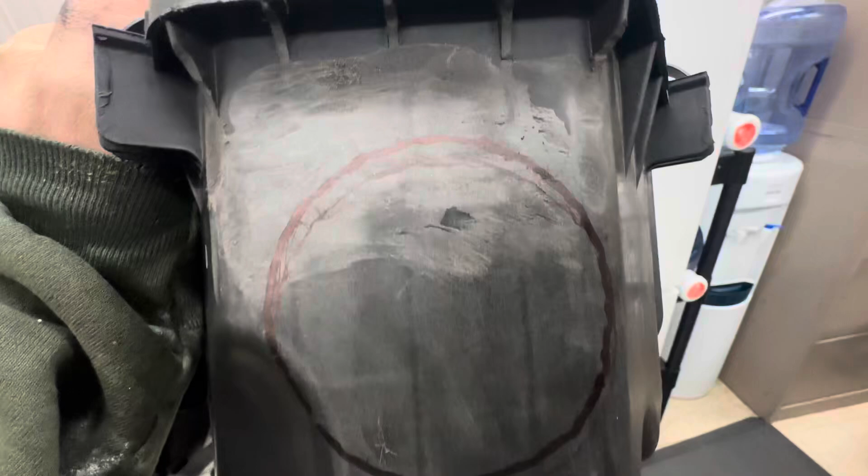Next step is to sneak a 3-inch hole saw right through the end of this, underneath where the air filter goes. Then the flange, the short end goes inside, the long end comes outboard. I'll drill a couple holes and use the stainless steel hardware to install that flange and waterproof it.

Okay, we have our 3-inch hole. Just barely snuck that in there.

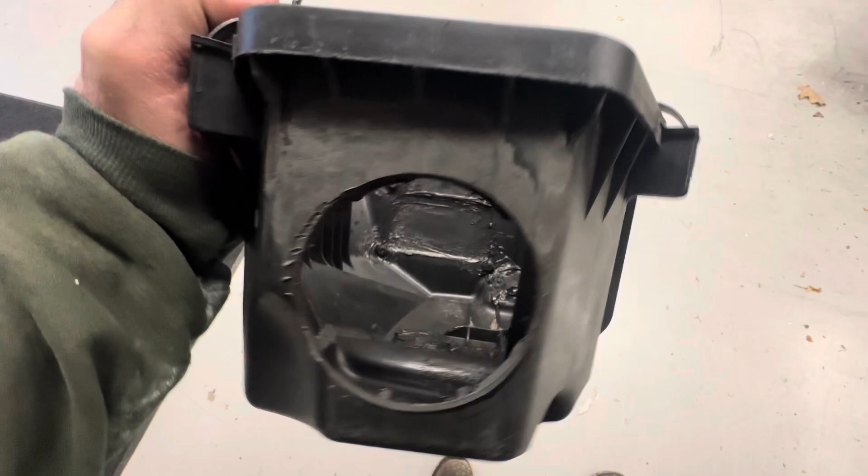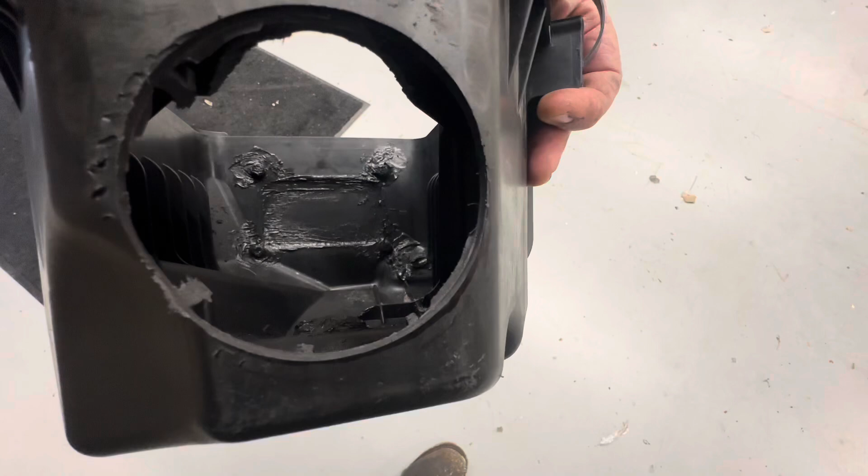As I said, the small part of the flange will go inside. We'll get that all siliconed up, duct seal, whatever I need. Then there'll be 4 holes that'll sneak in there for the stainless steel hardware - it's like an 8-32 by half-inch with a nylon locking nut. So I'm gonna take some sandpaper and clean that all up.

Obviously the air box for the 3.6 is slightly smaller on this side than the 3.8, so that's why it's just barely gonna squeak in there.

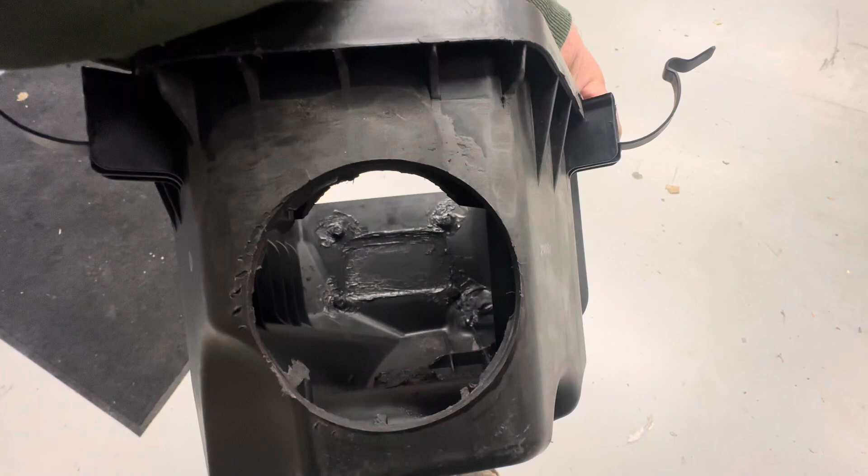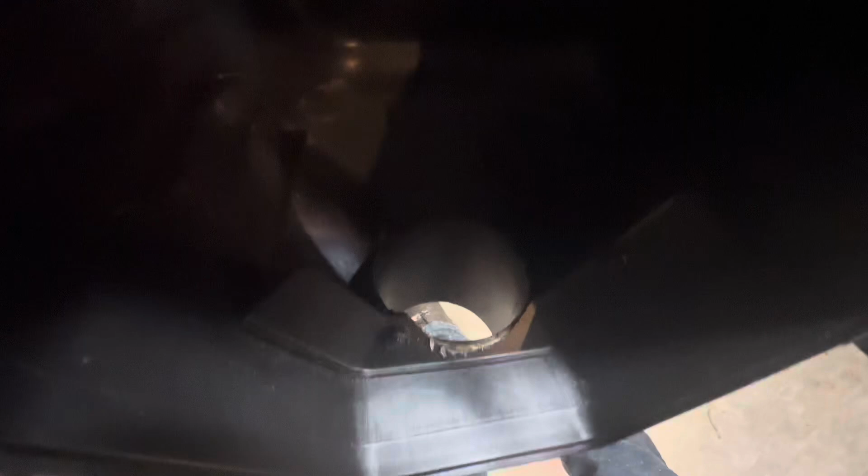Happily, the 3-inch hole fit perfectly. See the filter there. Obviously, I've got to silicone this all up - be a little tricky. I might have to. I think I can get the bolts through those holes right there.

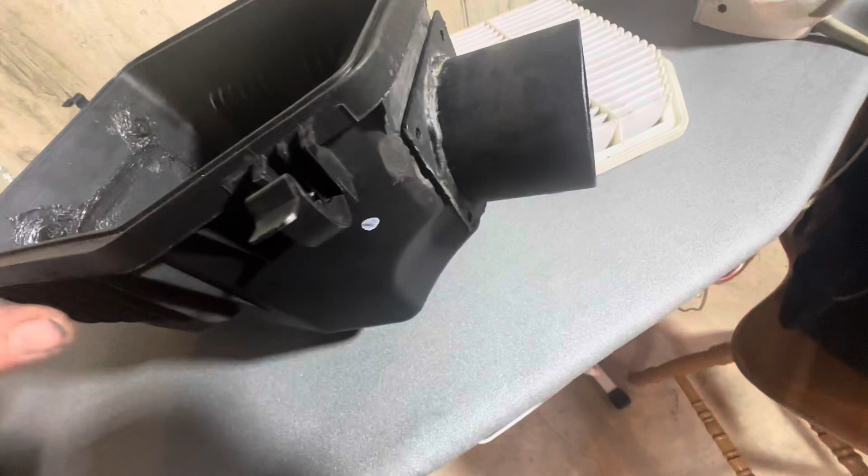On the bottom, it looks like I'm going to have to make a couple new holes. As I said, the air box for the 3.6 is a little different than on the 3.8, but this is going to work out great.

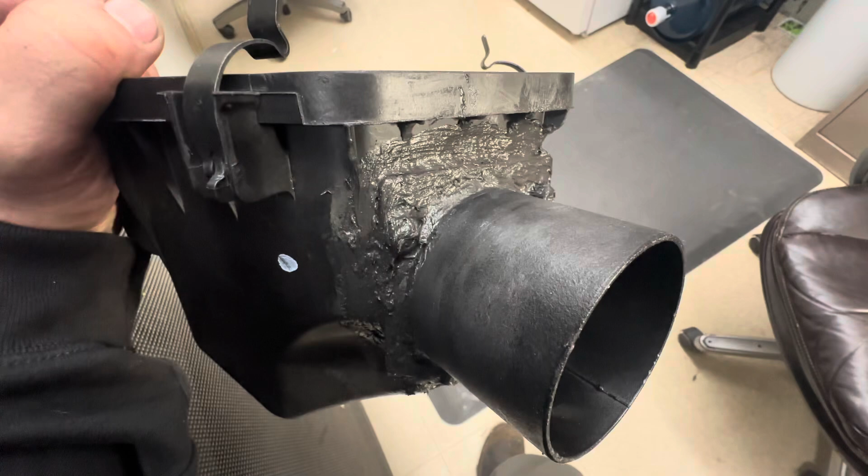Really nice. Okay, you can see that I had to drill some new holes in this flange because this side of the air box is a little smaller than the air box on the 3.8. The other thing I did is I put the bolt heads inside and put the nuts on the outside, and I was able to torque them up good.

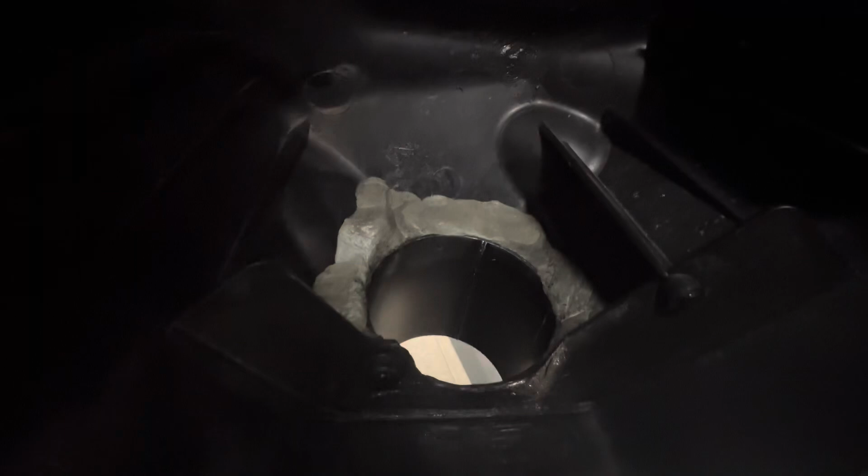A lot of silicone in there. When this dries, I'm going to put duct seal all around it. On the inside, you can see the duct seal all around. That stuff's incredible, it just gets really hard - it's an outstanding sealer. Quite honestly, Todd had something similar to this on his.

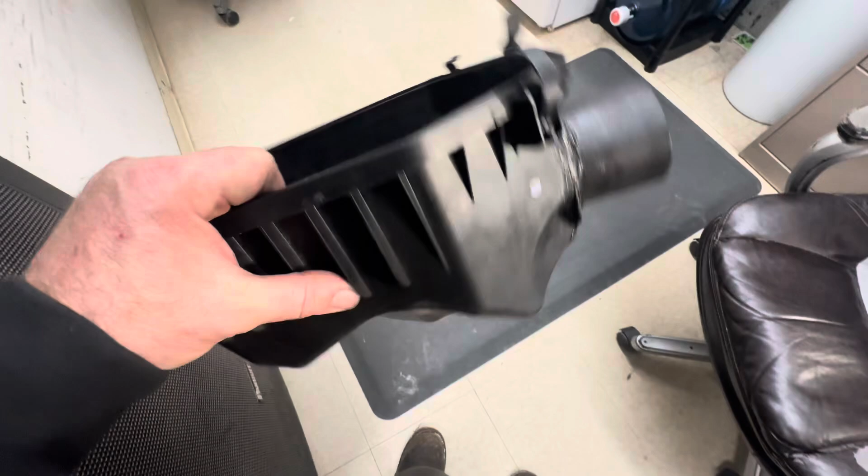So I think that when this dries, I'm going to put a nice bead of duct seal around this. That's going to dress it up and give it a whole other coating of protection. So the air box is just about waterproof - it's just got to dry now.

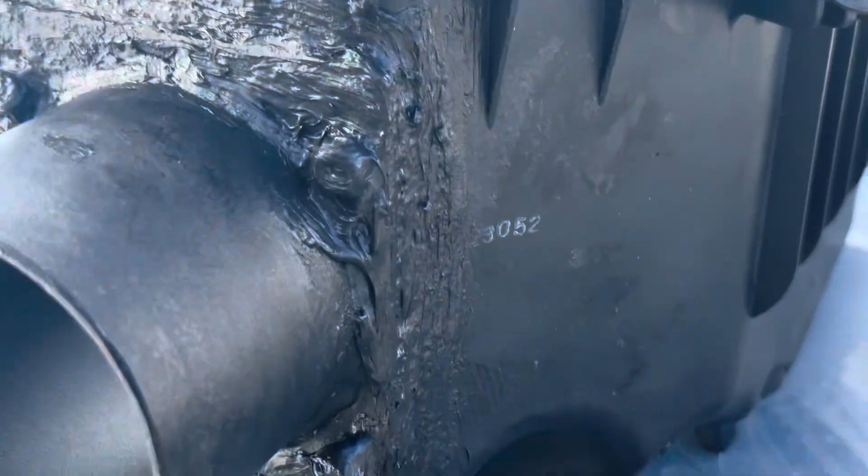Okay, the silicone is drying. It's sealed inside and out really good. You can see I reversed the nuts - it was just easier to set it up this way because that flange really fit in there tight and there wasn't much space. There's the duct seal all packed around there really well.

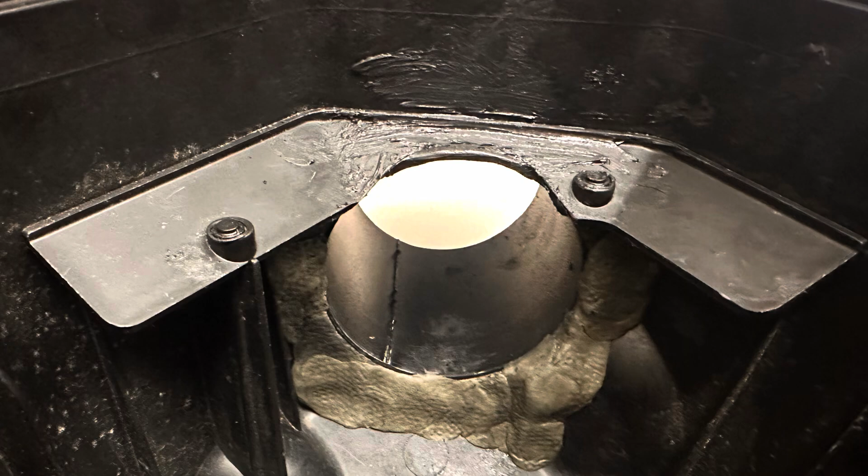After this silicone dries, I'm going to take that same duct seal material, there it is right there, and do a whole other nice coating over that. This stuff will dry kind of hard, but it's just extra protection. It looks better. Then I'm going to paint that entire exterior area black so everything's going to blend in and look really good. Quite happy with how this came out.

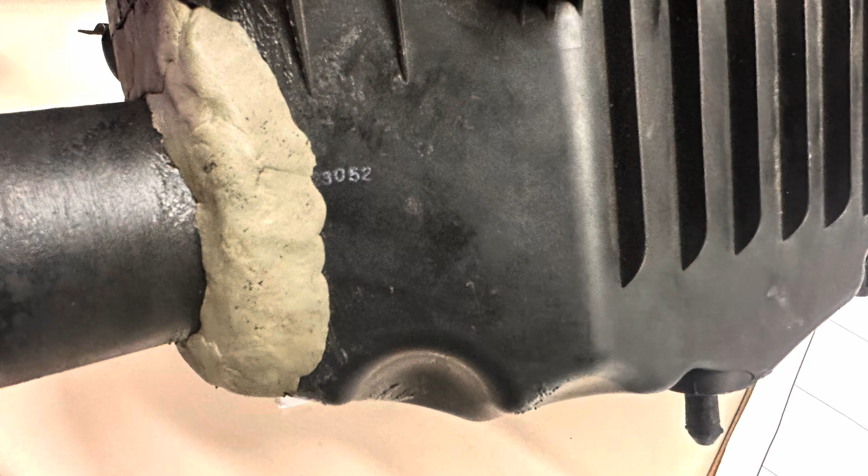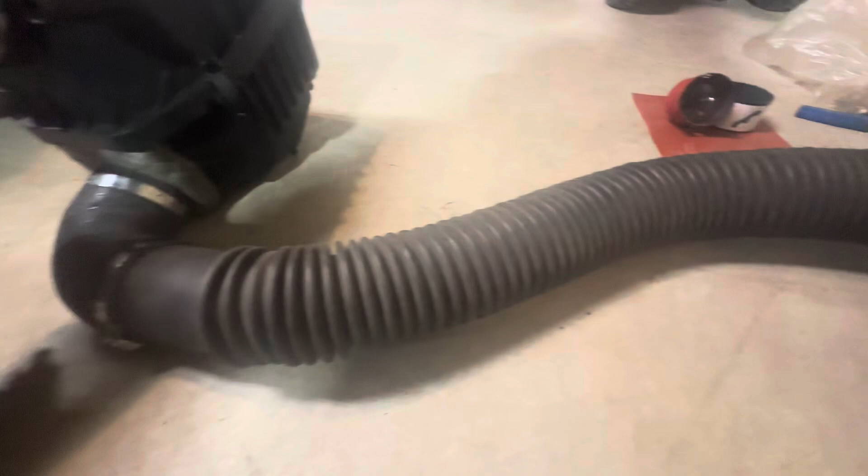All right, here's a look at the Snorkel setup in my basement, just kind of laying things out. I did get a bunch of new 3-inch hose clamps for this. I'm going to be polishing that up, probably repainting that mushroom piece right there. I want to get some silicone on these hoses and kind of bring them back to life, put some shine into them, clean them up good. So I'm doing that tonight, as well as spray painting the air box.

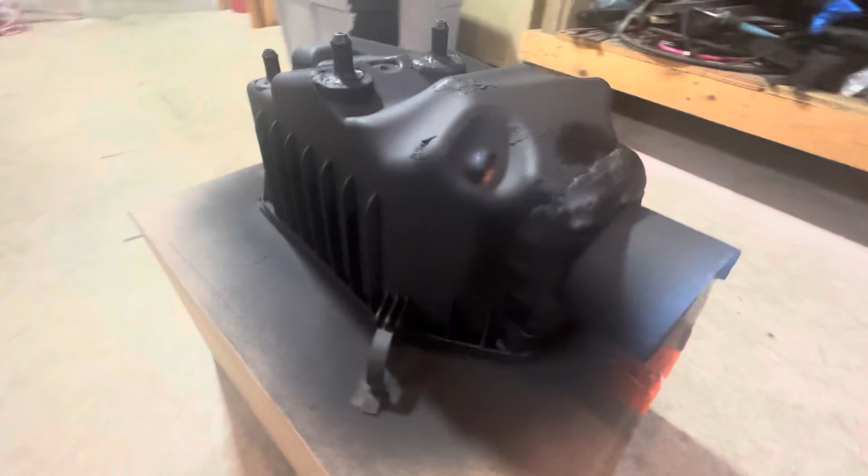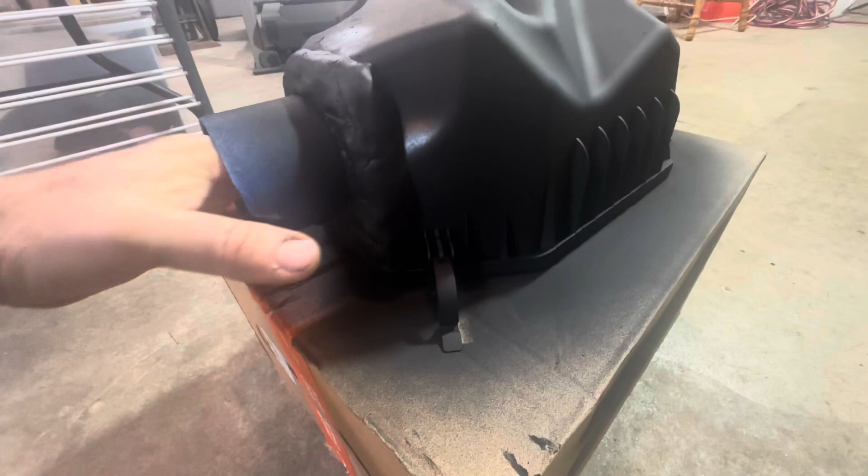Just painting the air box with some flat black spray paint. You can see the duct seal, the extra coating that I put all around the flange connection that was joined together with nuts and bolts and plenty of black silicone. You can see I just painted that up, so give this a little bit of time, and I just wanted it all to blend in.

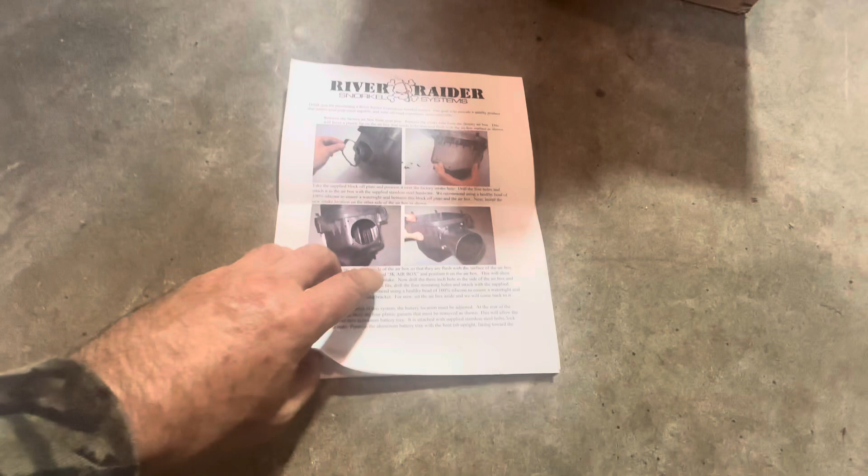Gonna be great. See, I was able to come up with some directions on the internet and print them out.

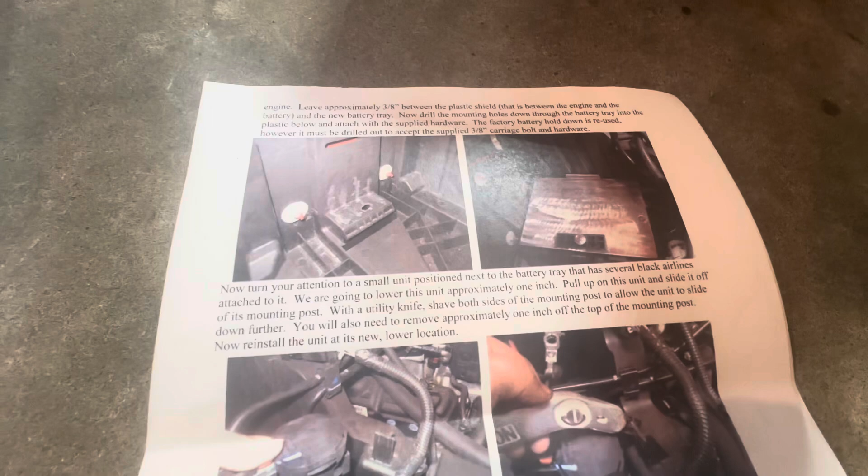Next, I'm going to be removing all the electrical and the battery, and grinding some gussets out of the battery box and installing an aluminum bracket, a holder basically, and shifting the battery over.

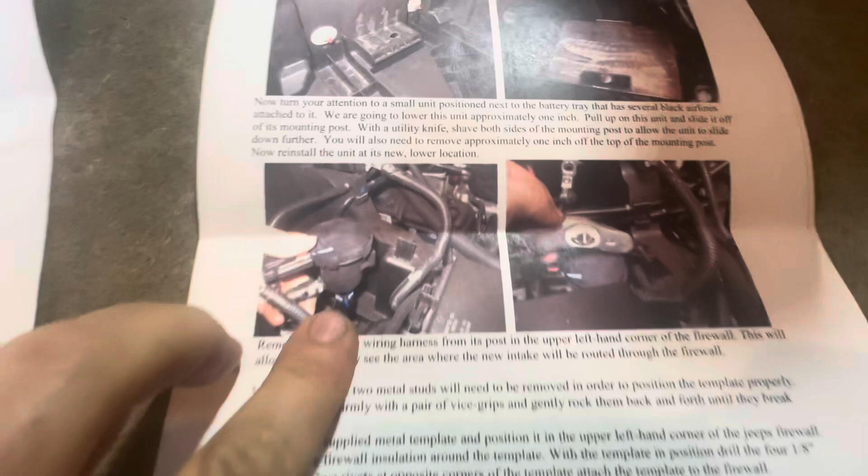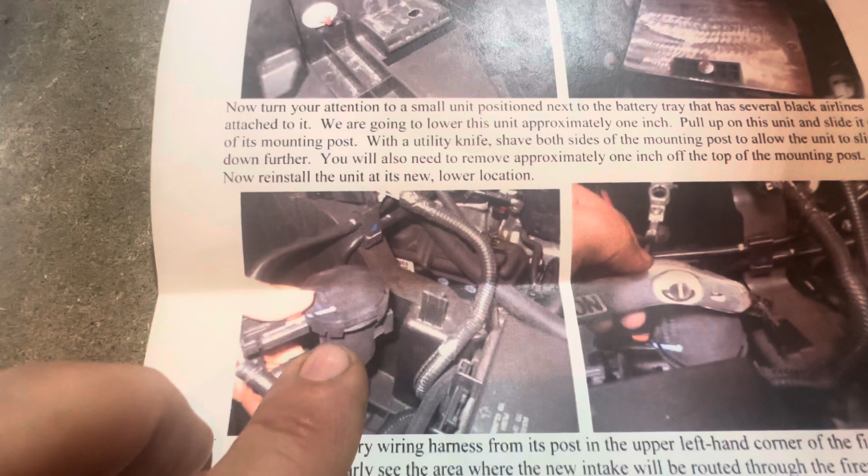You can also see there's a valve here for the evap canister - this needs to be removed. The bracket needs to be modified. This piece right here needs to be lowered about an inch, inch and a half. So that's the next step.

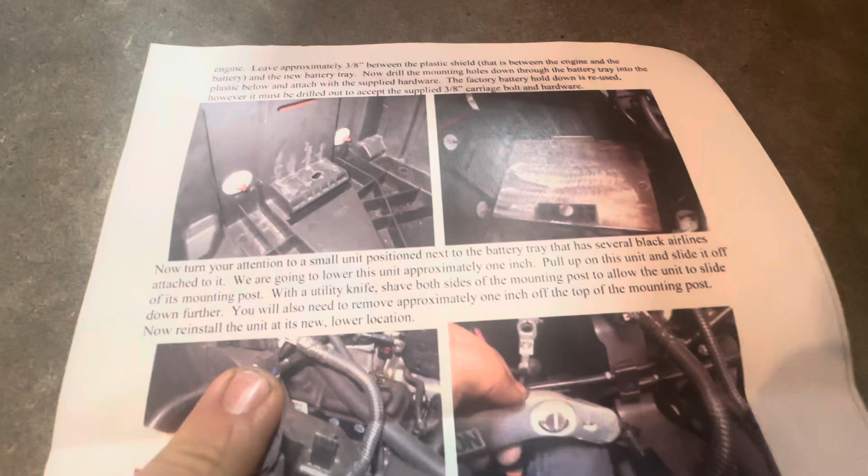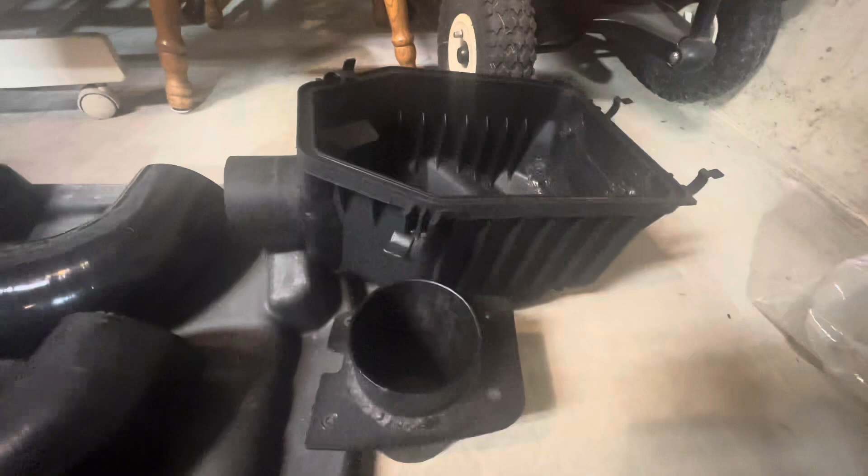I just about have this air box all set, so pretty soon I'll be taking the Jeep out of commission and relocating a lot of electrical. Then I got some drilling to do through the firewall, the cowl. Pretty excited. All right, you can see all the pieces.

They've been detailed very nicely. I put a nice coating on them. Everything looks brand new - really happy with how it came out.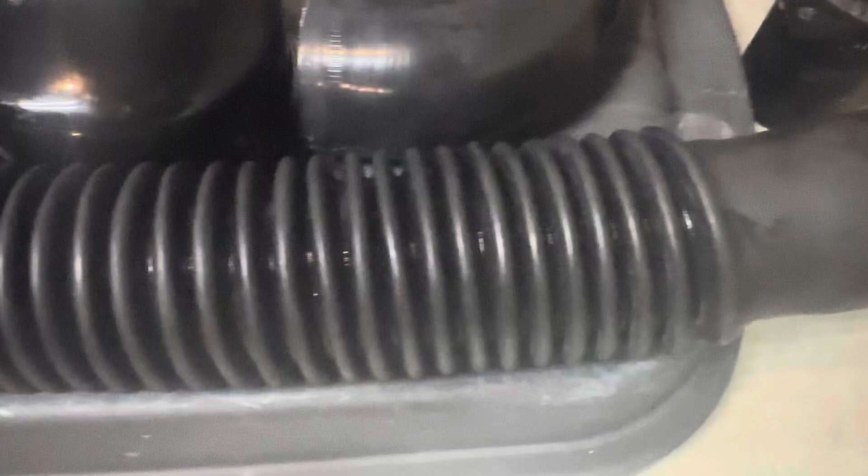The only thing I will be doing is that mushroom head that'll come out of the cowl. I will be repainting that and putting a little more attention on that. I think I'm going to get a custom decal put on the front of it.

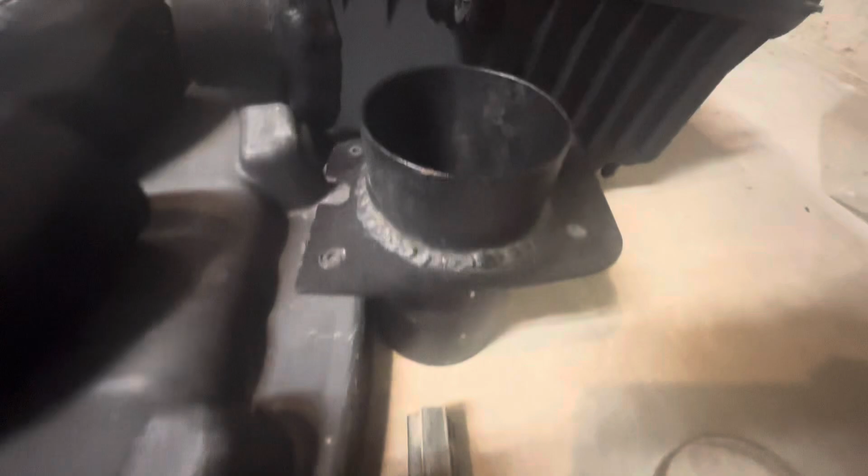So all these pieces are in the go position - new hose clamps. There's the bottom of the air box, all painted up in the go position. So getting ready for the next step.